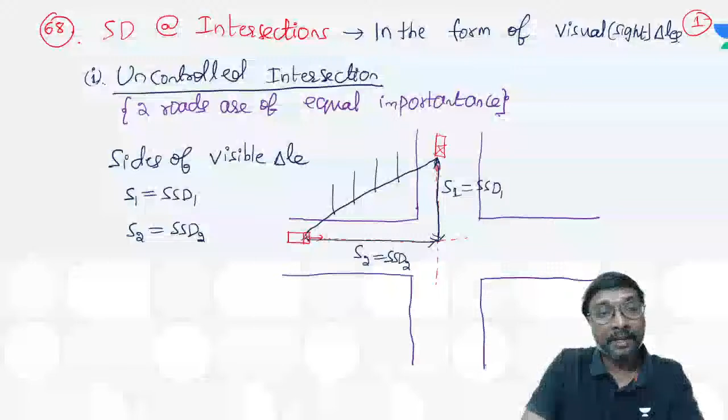Okay, now these are all over. Which chapter? Like that, cross section elements and all these things are over now. Geometry design we have started. Sight distances, overtaking sight distance, third chapter. Visual aids and all these things for the fourth chapter. Right now what is the fifth chapter? If you just observe, that fifth chapter is horizontal alignment only, yes or no? What is that fifth chapter? You can say this is your horizontal curves, right? So this horizontal curve got completed now, yes or no, if you just observe.

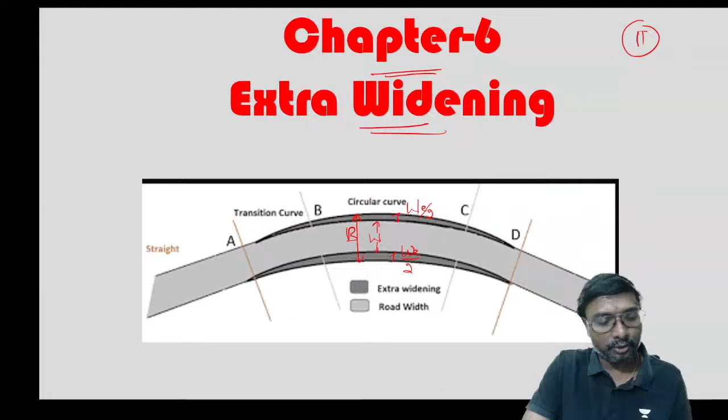Everything regarding this horizontal curve we have discussed now, everyone. So this is 85, 88, 90, 92, up to this extra width also we have done now. Yes or no? Chapter 6 extra width also we have done. Now here up to which point is it done? 98 it is done. Chapter 6 now extra widening, extra widening is your chapter 6, done.

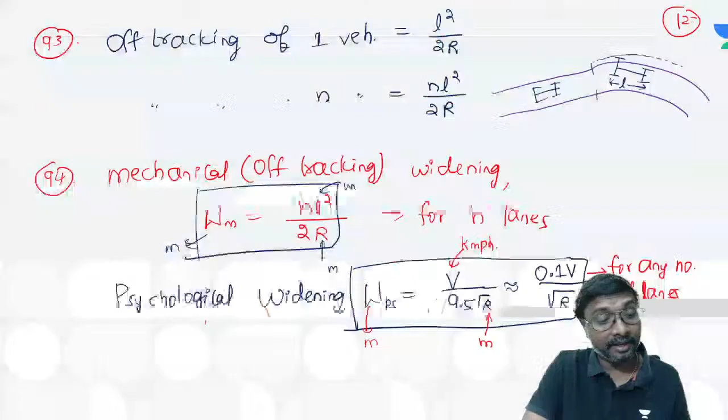And now coming to today's class, it is lecture 8, that is quick revision of Highway Engineering, horizontal alignment part 2 we are going for, on this 26th of March. Now here what is that? Is it chapter number visible? Chapter 7, curve resistance, you can say.

What is it? Chapter 7 curve resistance, that is your 98, are there now, yes or no, 98 are there. So we'll be going for which one? This is 99 also. So the 99th formula we'll be going for, 98 only completed, right? Yeah, 99.

So what is that? Curve resistance for front engine vehicle. Whenever you consider this curve resistance, what is the meaning of this curve resistance? It is a loss of engine power, or a loss of tractive force on the curve. Curve resistance for front engine vehicle. Whenever it is a front engine vehicle, what is it you can have?

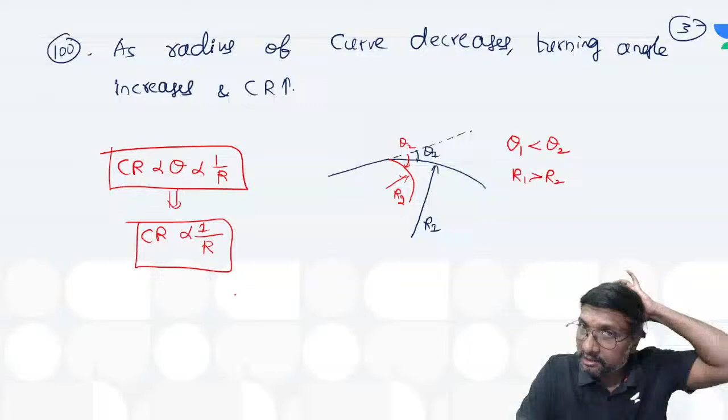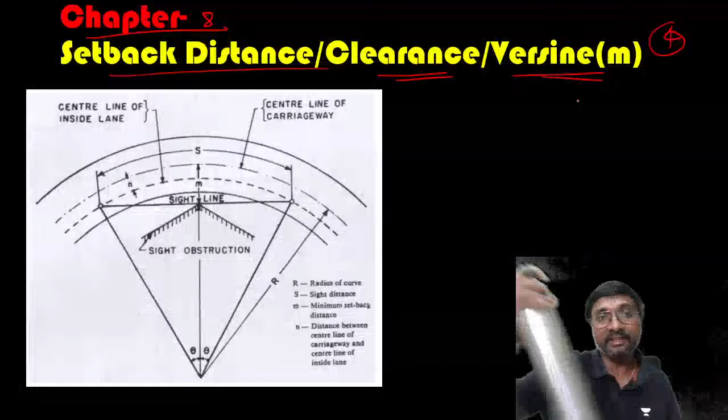This is your 7th chapter. Eighth chapter you can say, that is your setback distance or clearance or versine. What is the symbol we are giving for this setback distance or clearance or versine, everyone? Small m is the symbol we are giving.

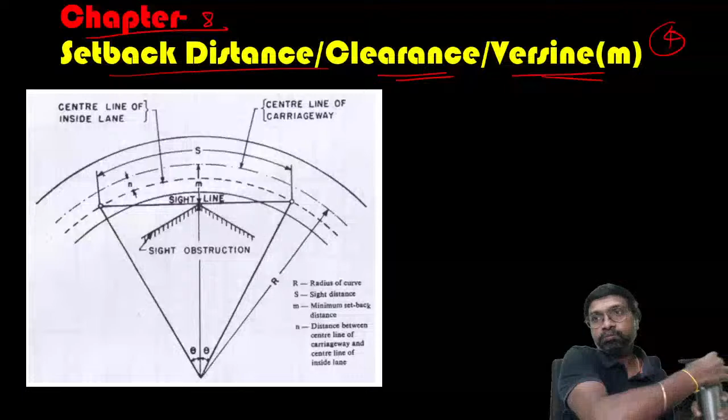Small m is the symbol we are giving, right? So this is what, 101.

Whenever it is a single lane road, first condition: sight distance is lesser than the length, and the length is greater than the sight distance. So what is the formula? Setback distance m equal to r minus r cos theta by 2. This is equation number 1.

And how can you get these values? If you observe, s is lesser, so that angle is with respect to s. So s equal to r theta. Therefore theta equals s by r. But if you want theta by 2, it's s by 2r, in radians. If you want theta by 2 in degrees, you multiply it with 180 by pi.

Now second condition: sight distance is greater than the length, or length is lesser than the sight distance, right? It's not possible to guarantee always that sight distance is greater and length is lesser. Sometimes sight distance is greater, sometimes length is greater, you can say.

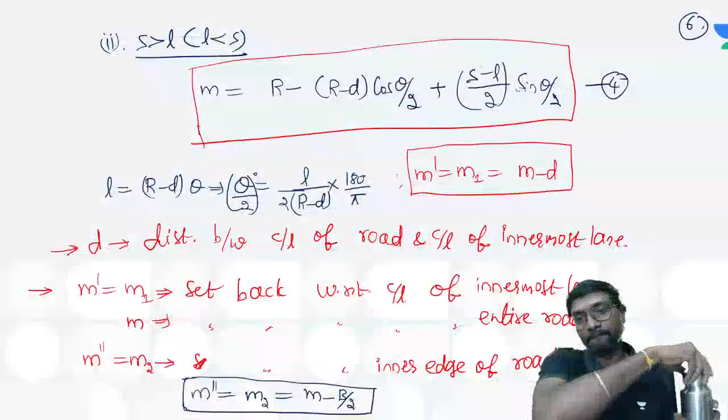Not a tell me, right? Done? Shall I move? Here, what is it, you can say? Just for an example, I will consider a 3-lane road for example. It can be applicable for any number of lanes, okay? But for example, I am taking the 3-lane road, okay.

This is your, these are the 2 lanes we are having now. One second. Here, this is your first lane, vehicles are traveling like this, right? This is your second lane, vehicles are traveling like this. This is your third lane, vehicles are traveling like this, right?

And sight distance on which one is important, right? Sight distance on this innermost lane is only important enough. Here, this is the center line of which one? This innermost lane. This is the center line of which one? This entire road, right? Because that side 1.5, this side 1.5, na? Right, center line of entire road.

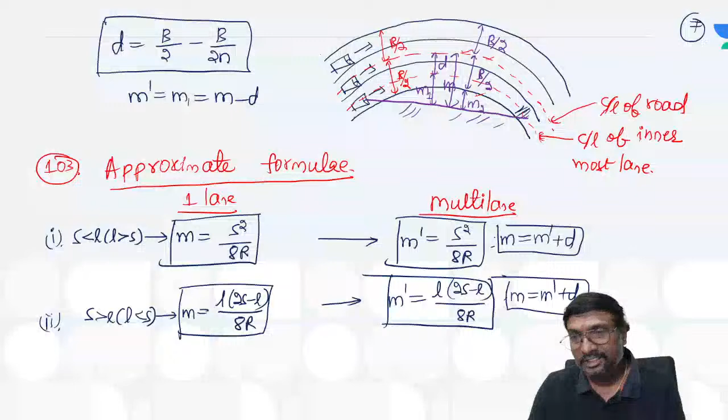Engineering mechanics. Okay, shall I start with engineering mechanics then? I'll start with engineering mechanics after highway is over. Okay, no, after surveying is over, I'll start with engineering mechanics. Then after that, SOM I'll go for. Engineering mechanics, just 3-4 classes will be enough, not more than that.

For structural, you have to start with engineering mechanics. Then you go for which one? SOM. After that, you go for structural analysis. Then RCC. Right? That sequence is good to follow. Okay.

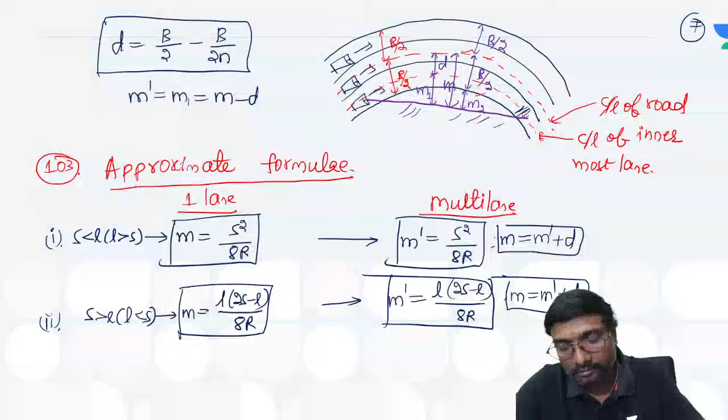Next we'll be moving on to next chapter. Which chapter is it? Is this 8th chapter? Ninth chapter, you can say.

Transition curve, right? We make a heading and we'll start. So once we discuss transition curves and this gets over, this horizontal alignment gets over completely.

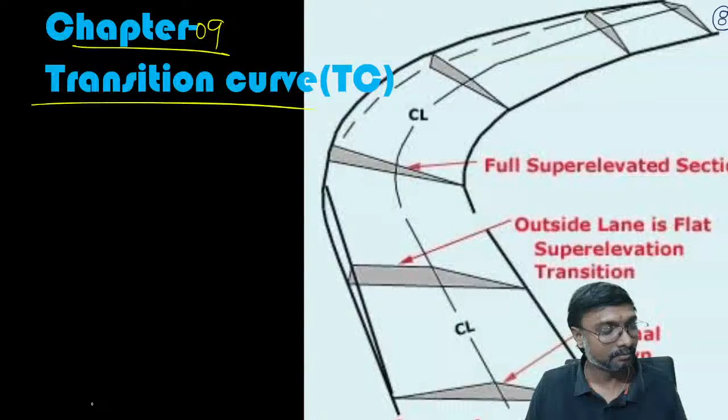Done? Heading is done, everyone? Now here, what is that part? 103 is over, na? This is your 104. So for this transition curve, right?

What is the property of this transition curve? Tell me mainly, what is the main property influencing the selection of shape of this transition curve and all those things? The length of this transition curve is inversely proportional to the radius. Means Ls into R will be equal to a constant only, or not? Yes.

Yes, it will reduce uncomfortable conditions, right? First of all, what is the purpose of this transition curve? Purpose of transition curve is what? Here if we just observe first one, what is it? You can say gradual introduction of what?

What will be introduced gradually, right? Originally, this is the alignment with sudden changes in direction. But what is it we need to do? We will be providing a horizontal curve here.

So whenever you are providing a horizontal curve, just on the left side, what is it? Radius, straight line, infinite. Just on the right side, what is it? Finite radius R. Just on the left side, what is the centrifugal force? Zero. Just on the right side, what is the centrifugal force? Full centrifugal force. Just on the left side, what is the super elevation?

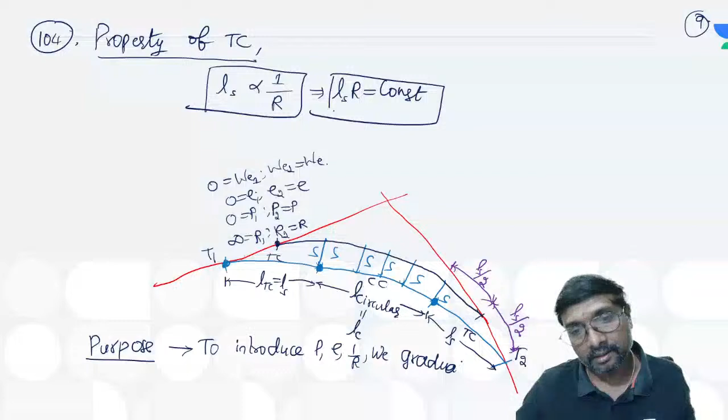Purpose of transition curve is what? It is to introduce which one? It is to introduce this centrifugal force, super elevation, curvature, and extra width gradually. Got it? These are all gradually introduced. Okay.

Right, now listen, tell me. At this point, tell me. Property and purpose both we are writing in the single point, 104 point itself. Right, now this 105.

So how can you get that length of a transition curve, you can say? Length of transition curve LS, right? This will be maximum of all the values, na? It is a maximum of all the values or not, right? What are the maximum of all the values, right? What is the first one?

You can say based on this rate of change of centrifugal acceleration, right? LS equal to V cube by this CR, na? Or you can also write it as this V cube by this JR, or not? Yes or no? And what is it, C or this J? You can say that is dA by dt, na? Means rate of change of acceleration, which acceleration? Centrifugal acceleration only, right?

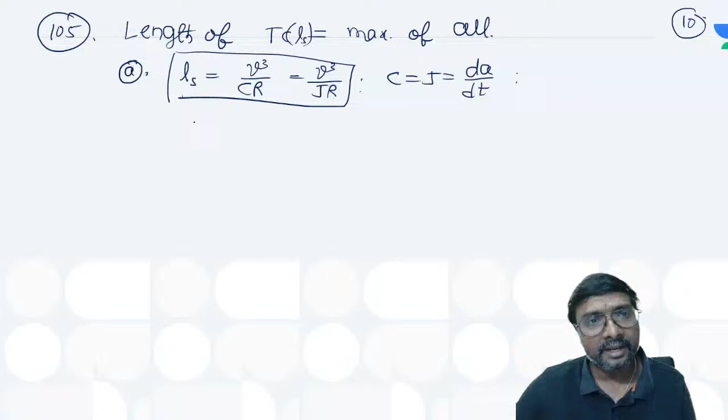And here, what is the LS? LS will be getting in meters. R you have to substitute in meters. That is C we have to substitute in which units? Tell me, CR this is J. Acceleration already, yeah, acceleration unit itself is meter per second square, na? By time is nothing but your second. So what is the unit of this J or this C? Meter per second cube, na? Absolutely, that is your meter per second cube.

What is the V unit? What is the V velocity or this speed unit? You can say that is your meter per second, na? Meter per second you can say.

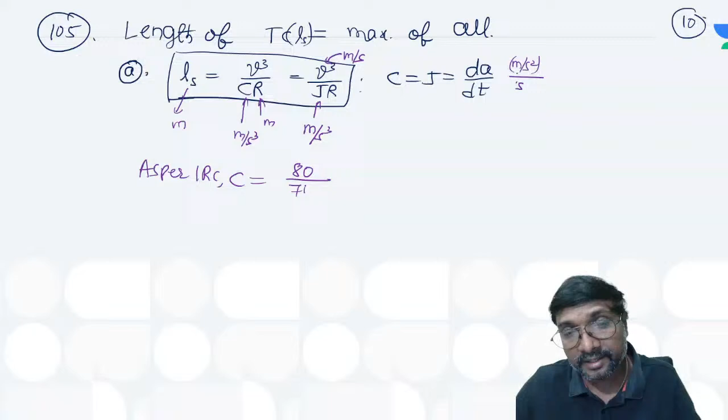And what is the C value given as per IRC, if we just observe? As per this IRC, that C will be equal to what is it? 80 by 75 plus what is it? Capital V, is it? It is not R, you have to be careful. Many people will confuse that R. It is V, okay? 80 by 75 plus V.

In my childhood means BTech, in my BTech time also I used to confuse with the same 80 by 75 plus R only I used to remember. Even I used to remember R. Many faculty used to say R also. That is a problem, but it is V, not R. Okay, you have to be careful.

That is C will be in which one? This meter per second cube. This is your which one? This kmph, okay, this is kilometers per hour, right? Kmph. Okay, and that C value, 0.5 lesser than this C, lesser than which one? This is 0.8. So we have to allow the C value between these two values only, right? We should not allow beyond these.

Instead of V, people remember R instead of V.

Second one, what is it? Based on the rate of change of this super elevation rate. Whenever it is the rate of change of super elevation rate, LSC is equal to E into N into W plus WE. And LS will be equal to E into N into W plus WE, whole divided by 2.

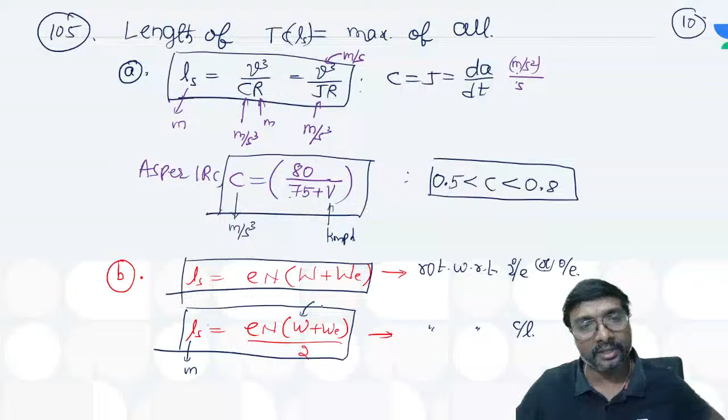LS will be getting in meters. E and N, they don't have any unit, right? W and WE will be having meter as the unit. Got it now?

Note this and tell me, so what is that C? C is nothing but the rate of change of which acceleration? Rate of change of which one? This is centrifugal acceleration, no?

This is centrifugal acceleration, or you can also call it jerk.

Now here, what is that n value? 1 by n value, if you just observe, is nothing but the rate of change of super elevation, right?

So what are these values as per IRC? This will be taken as 1 in 100 for urban roads. Now for rural roads, 1 in 150 is taken in case of plain and rolling terrain. And 1 in 60 is taken in case of hilly and steep terrain.

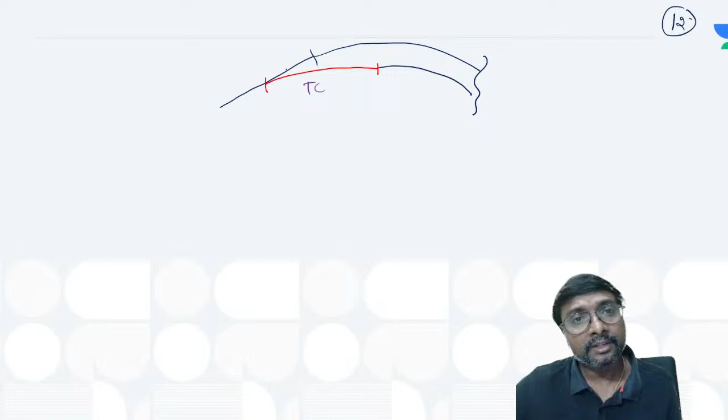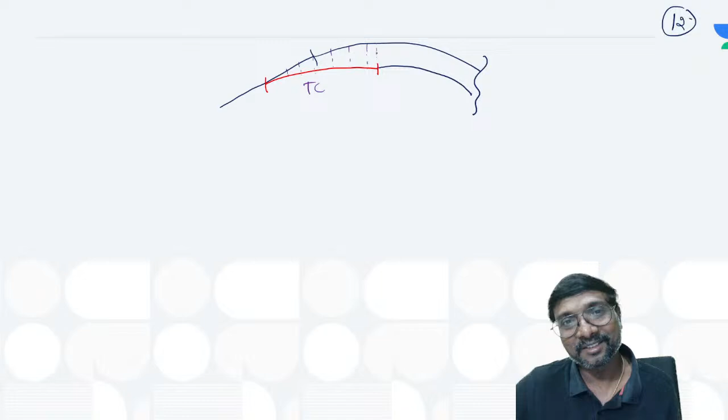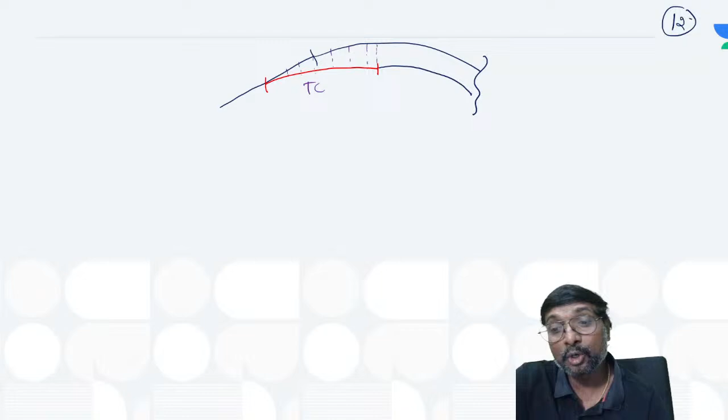Here is the starting point of this transition curve and the ending point of this transition curve. From starting to ending point, observe how much it is shifting. So here, if the alignment is provided at the same location, is it possible to provide the transition curve, or do we have to shift it inwards definitely? Without shifting the alignment, is it possible to accommodate the transition curve? It is impossible to accommodate a transition curve without shifting the alignment inwards, right?

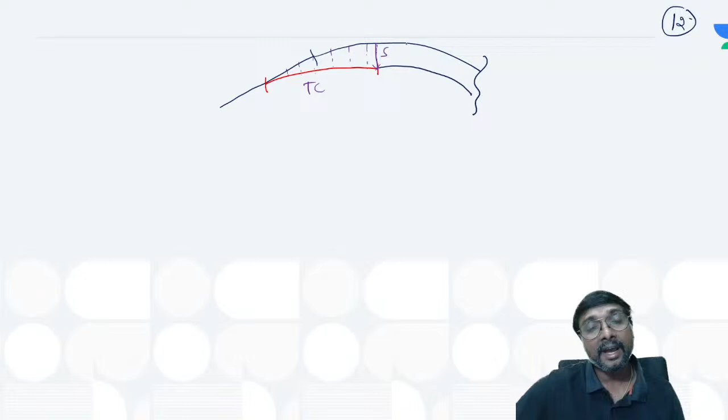But if you observe, from the starting point to the ending point of the transition curve, the zero shift is increasing. On the circular curve, do you have different shifts, or the same shift of the alignment through this horizontal curve throughout? It is the same shift throughout. But here these values are zero shift, you can say. Somewhere it is s by 2 shift, somewhere it is 3 by 4 s, and here it is 0.

The shift will be increasing, na? From one end to the other end of the transition curve, it is increasing gradually. But for this circular curve, it is the same throughout. Shift of curve means, you can say, it is for this circular curve only. Understood? Shift of circular curve only, right? Got it now?

Next, last point under this transition curve, 107. What is it, you can say? What are the three different shapes we'll be having? Tell me, if you just observe. What are the different shapes satisfying this transition behavior, everyone?

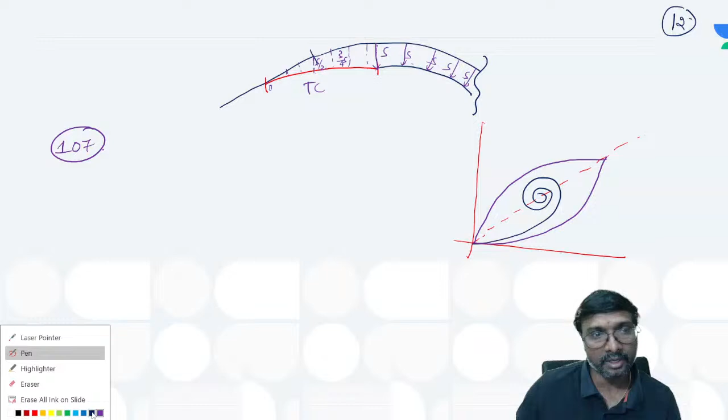This is your spiral. What is the next one? That is your Bernoulli's Lemniscate. Next, what is another one? This is your cubic parabola.

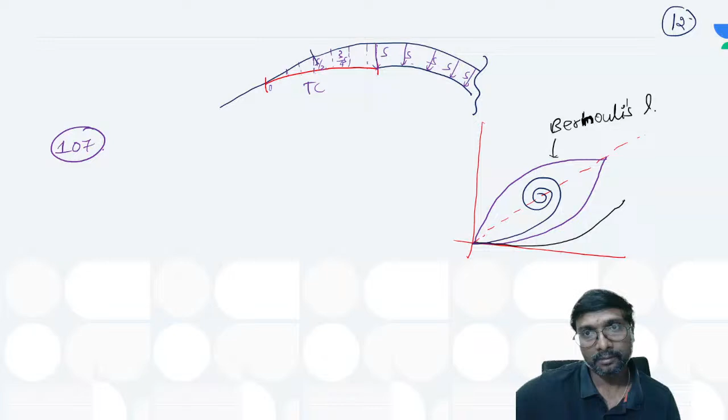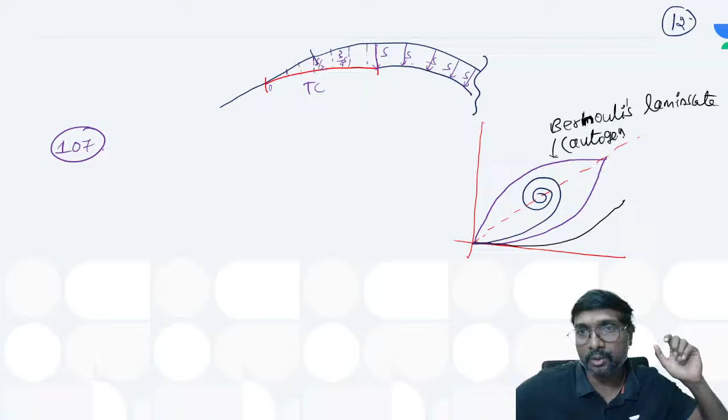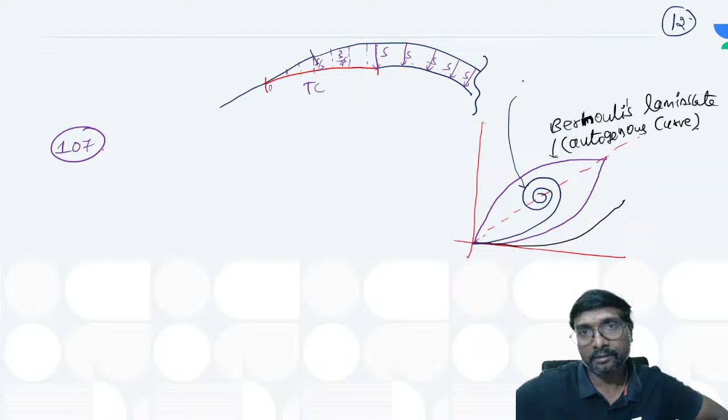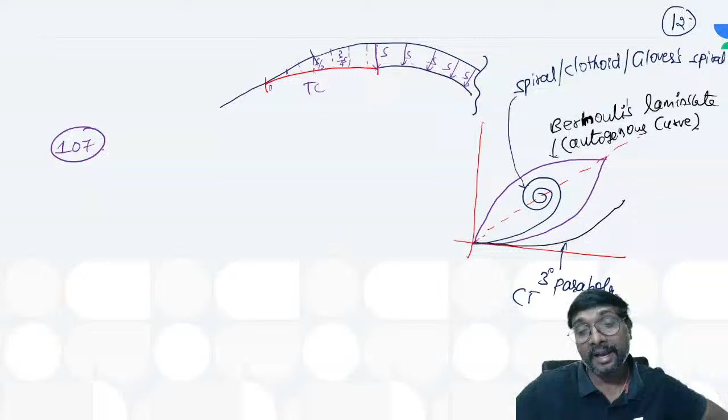So this Bernoulli's Lemniscate is also called with which name, if you observe? Autogenous curve. What is the meaning of this autogenous curve? Automobile-generated curve, if you are leaving it freely. Now what is this one? Spiral, or clothoid, or Glover's spiral. Now what is this third one? Third degree parabola or cubic parabola. Third degree parabola or cubic parabola, and what is it? You can say it is Froude's transition curve, right? Because that Froude fellow identified that this is acting like a transition curve first. So you call it Froude's transition curve, right? Got it now?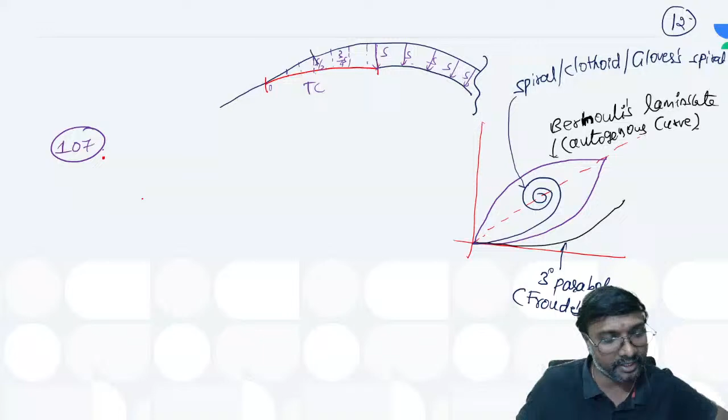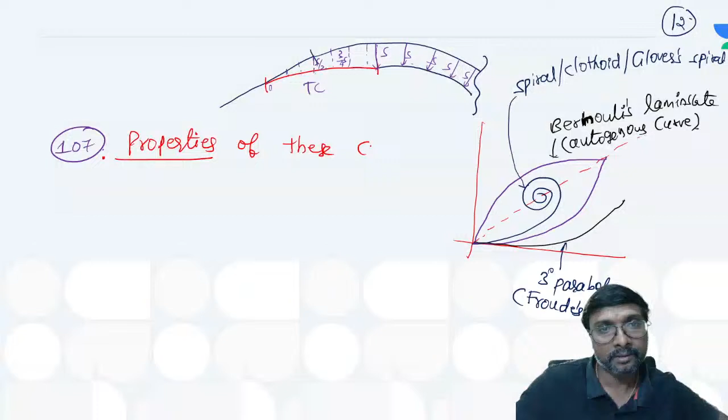Now here, if you observe the properties of these, what is it you can say? Properties of all these curves. What are the properties of these curves? Tell me, first and foremost one.

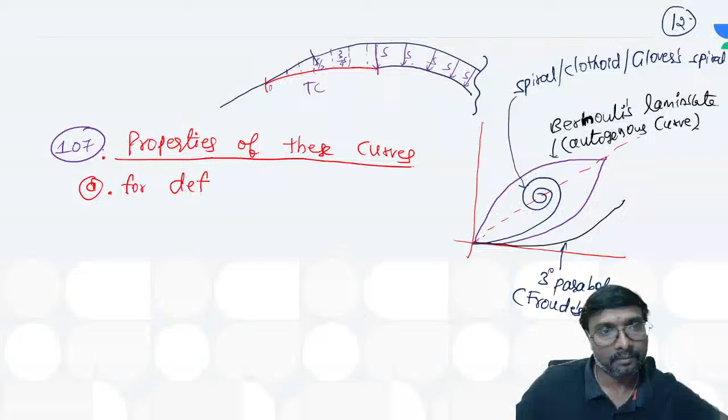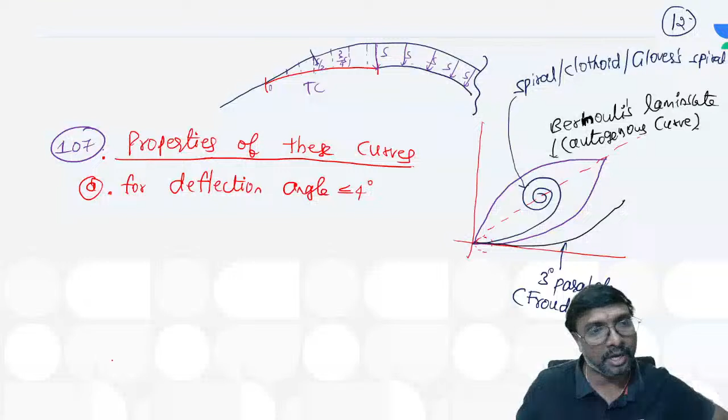For a deflection angle lesser than or equal to 4 degrees, if you observe, all the three curves are coinciding at the starting, for a very small deflection angle. So whenever it is for deflection angles lesser than or equal to 4 degrees, what happens? All curves have the same shape. So do you have any problem if you are constructing any one of them, if the deflection angle is up to 4 degrees? No problem, no?

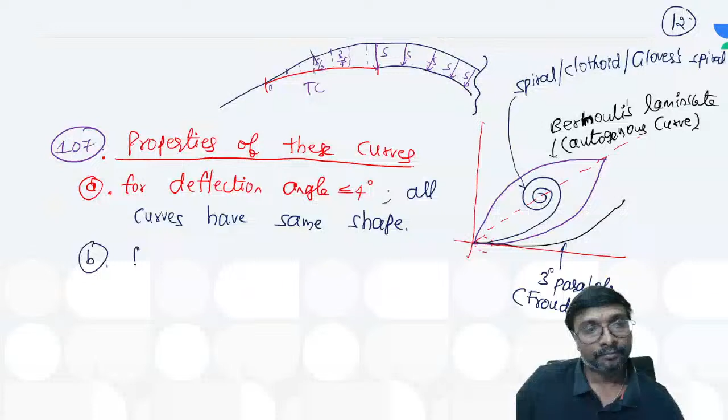Second one, for spiral. For spiral, what is it you can say? Rate of change of radius or curvature - is it uniform throughout the length or not? Rate of change of radius or curvature is uniform throughout the length, right? Is it not advantageous? Throughout the length, the same rate of change of radius is there, meaning it is absolutely advantageous, you can say, right?

Now, next one. For this Lemniscate, if you observe, when you consider it, what is it you can say? That the rate of change is what?

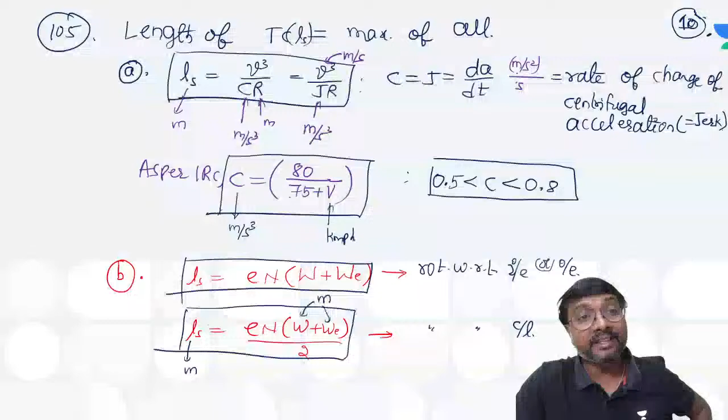Disrupted means disturbed, right? So it means a non-transition behavior. Disrupted means not feasible, means it is not having the same behavior what we have mentioned. What is the behavior we have mentioned? If you just observe, length is inversely proportional to radius. As the length increases, what should happen to the radius? Radius must decrease, right? That is the transition behavior. It is disrupted means as the length increases, radius also increases, right?

That is what. Now, for lesser than or equal to 90-degree deflection angle, rate is which one? Rate of change is nothing but your radius decrease, na? Rate of change means rate of decrease of radius, na? Rate of change of radius is uniform, but with what conditions? Slow rate. Slow rate or small rate, both are same, na? No.

For this greater than which one? This is a 90-degree deflection angle. Same, rate of change is uniform, same uniform only, but with which one? This is a fast rate. That is only the difference. Understood?

So up to 90-degree deflection angle, rate of change is uniform, but a slow rate. Beyond the 90-degree also it is uniform only, but fast rate, right? So here as per IRC, what is it you can go for?

As per IRC, for this road transition curve, whenever it is a road transition curve, right, which shape is preferred? Tell me. Shape preferred is which one? Tell me. Spiral, na? Spiral, and what is its other name? Clothoid. Okay. Clear everyone? So this completes which one? This is a transition curve, you can say, right? Okay, or this one, tell me everyone.